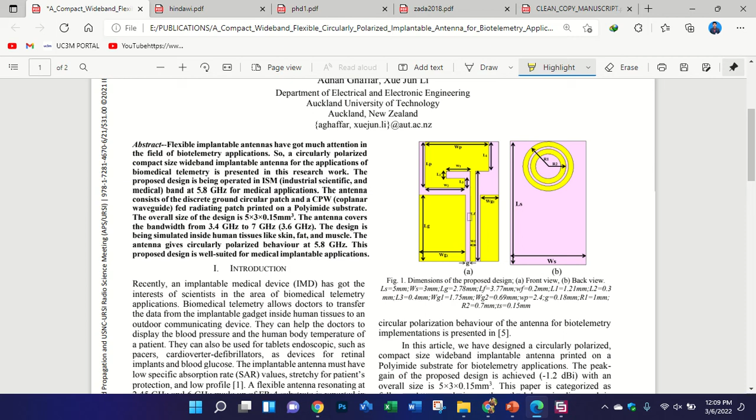So you can see here, this is a very simple design, as I showed earlier. This is a CPW ground plane, and the patch, you can see, is a modified patch, and it is circularly polarized. The size of this antenna is very small. It has a length of 5 millimeters and a width of 3 millimeters, meaning it is a 5 by 3 millimeter square area.

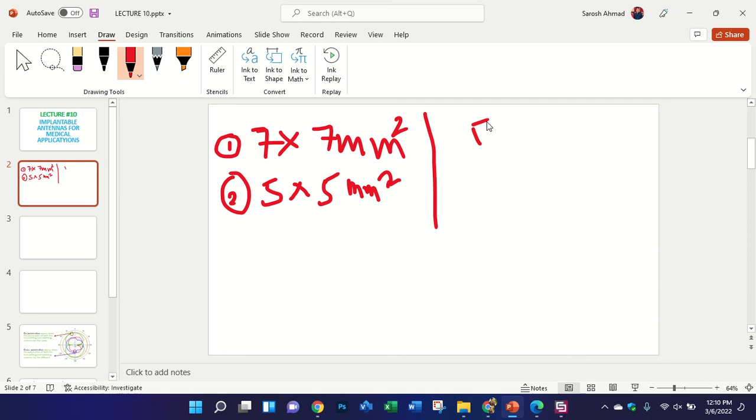Here one question arises: is this size inside the human tissue, or is this size in free space? Actually, in most papers, researchers design antennas not in free space. They do not target free space; they only target inside a human body.

In most designs, what we do is first design the antenna, then test it on human tissues and check whether the results are compatible or stable inside the human body or not. But in the case of implantable antennas, it is optional that you design the antenna in free space and then test inside the human body to check whether the results are stable or not. People, meaning researchers, do not usually focus on free space design; it can be inside the human body, your human tissue.

People do not focus on this, but in some of my papers I design antennas this way. If you make the implantable antenna in free space and it also works in the human body, then this is another kind of novelty, because when you insert the antenna into human tissue, the results will surely change due to the high relative permittivity of the skin or the muscle.

But if you do not want to make the design in free space, that's because if you design the antenna in free space, the size of the antenna will be large, and you also need to check whether it is working inside the human body or not. But if you only design the antenna for the human body, then it will be less than 5 by 5 or 7 by 7, or maybe even smaller. So in this design, first I designed this antenna in free space.

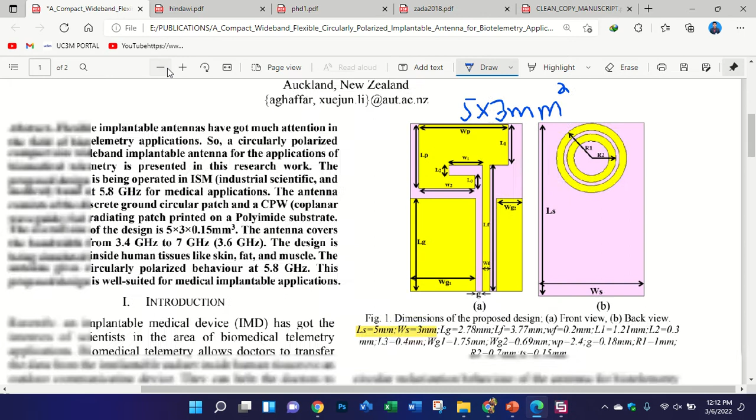This is a monopole antenna, and you can see this is the result in free space. This is the S11 that has a wide bandwidth, you can see here. This is the bandwidth, and this is the axial ratio, in free space.

But then I tested the antenna in different tissues of the human body. I tested it in free space, the red one is free space. The second, I tested inside skin, the green one you can see is also resonating at 5.8, and then inside fat, the blue one, and also inside muscle. You can see it is less than 10 dB at 5.8 gigahertz.

This is another novelty, that the antenna works in multiple tissues. In most cases an antenna works only in one tissue, like skin, fat, or muscle. We only check two kinds of tissue: skin and muscle. Forget fat, because in practical use fat is not available, only skin. For the skin we use skin mimicking gel, which has the same properties as human tissue, and for the muscle we use pork material, which has the same properties as a human body.

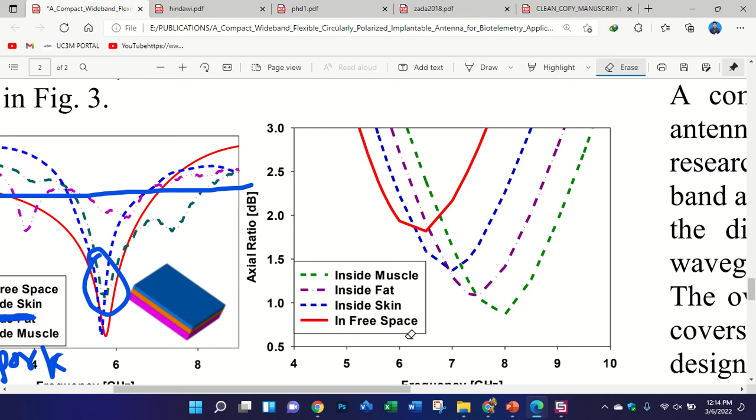You can see here the behavior of the axial ratio. It is less than 3 dB in all cases, inside fat, skin, and muscle. This antenna works both in free space and inside human tissues. You can see the size here - I compared the results with previous research, and I have a very small size compared to previous research.

I will tell you which paper you need to follow. This is just an idea to share with you, how we can design a monopole antenna. But in the case of the implantable antenna, I suggest you make a patch antenna - a slotted patch antenna fed by a coaxial probe, like this one.

Let me discuss one more paper that also works in free space, as I told you in the previous lecture. This design operates at 2.45 gigahertz. It has a size of 21 by 13 millimeter square. You see it has a much larger size than other designs, because it works both in free space and inside skin tissue. You can see it operates at 2.45 gigahertz.

This is also a circularly polarized antenna, tested on human tissues - skin, fat, and muscle. I tested the antenna inside skin tissue, and also it works inside muscle. This is the behavior of the S11.

So in this way you can design whether you want to design in free space or in human tissues. But for IEEE journals, I suggest you focus on only one thing - first check your design, either you want to design inside skin tissue or inside muscle. Also check whether fabrication or measurement facilities are available for skin tissue or muscle tissue. In our lab both facilities are available, inside skin and inside muscle.

So this is the paper that I want you to follow, and I will also share with you some more IEEE journals. I have more than 200 papers on implantable antennas, from many researchers, for you to follow.

You can see here this is a very simple design - an X-shaped slotted patch antenna. It has a size of about 5 by 5 millimeter square, here the values are written, L1 and W1. Yes, it has a size of 7 by 7 millimeter square.

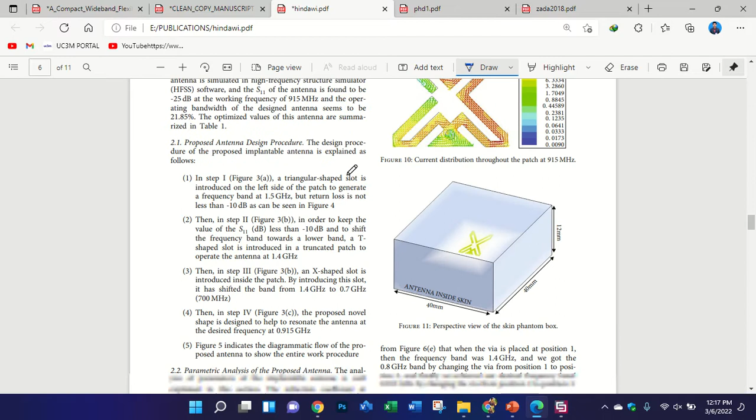This antenna is designed inside, I think, muscle or skin tissue. You need to simulate your design. In the previous lecture we first designed the antenna and then created the human tissues, but in the case of the implantable antenna you need to do the reverse process - you need to design the human tissue like skin first, and then design the antenna. We will study this case.

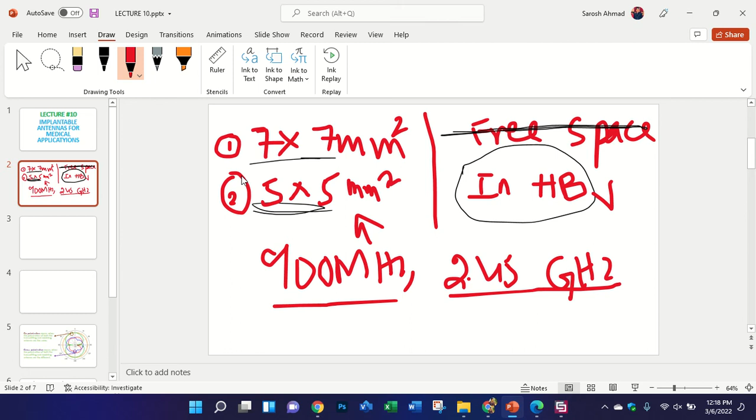This is very easy to design. Say I'm going to design a new implantable antenna with a new shape. I suggest you keep the frequency band at 900 megahertz or 2.45 gigahertz, and you only need to design inside the human body, no need to design in free space. So you can design at 900 megahertz or at 2.45 gigahertz, and you can use these sizes. If you know the size, you won't need so many modifications - you just need to play with the patch or the ground.

Now I'm going to design a new shape of implantable antenna. This is a patch antenna, and here I write the frequency - it can be from 0.3 to 3, or you can use 0 to 3, because for the moment you don't know at which frequency your antenna will operate, so you can take multiple frequencies here.

Okay, so you need to test your antenna both inside skin or inside muscle, and then you need to check in which tissue it is showing the best performance. So first, as I told you, in the implantable antenna you need to do the reverse process. You need to design the human tissue first, like skin. Okay, I am going to design skin tissue first. Skin, and I take the value of how much we have used here.

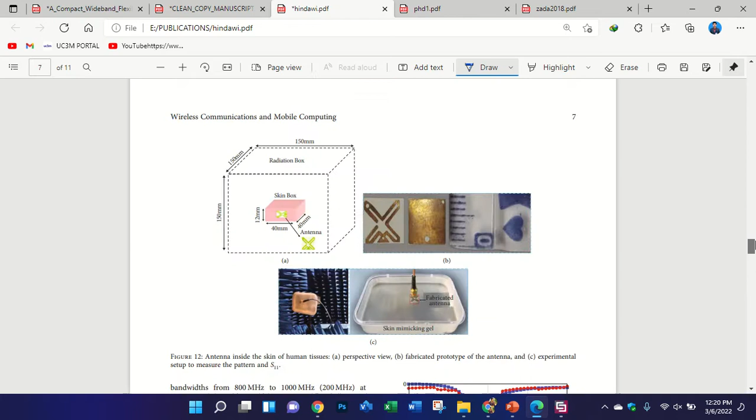This is another paper in which you can take the size. You can take, I think, minus 50, by 2. Okay, and also you can take here 25, like this. Or you can take more if you want. It is not an issue.

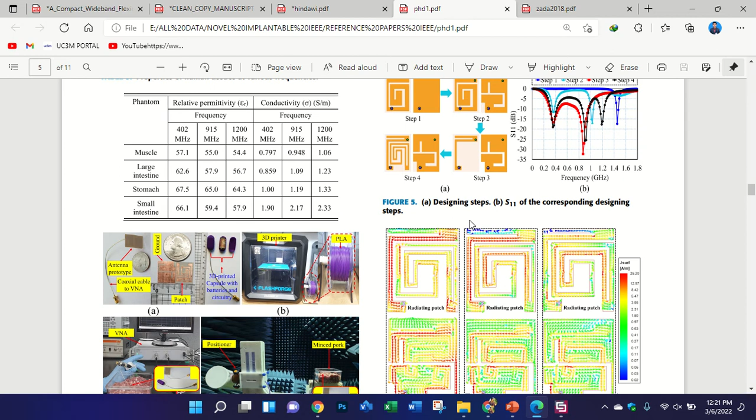And here I'm creating a new material of the skin tissue. Skin. Okay, and the conductivity I use here for the skin. They have tested inside muscle. Here I will, I think, return the values of the skin. Okay, anyway, I remember the values.

For the epsilon, it varies from 38 to 42. So you can take 38, or 40. 40, yes. And for the electrical conductivity you can take 0.88. Okay, so this is your skin tissue. If you want you can hide this skin tissue. And this is your WCS. Okay, now you can align WCS. Yes.

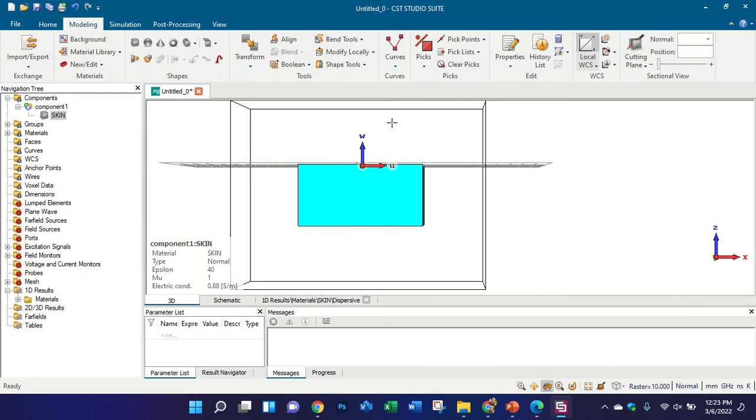Walaikum assalam. I want to ask you, if we begin to design the antenna itself, I think we will use lambda G, the guided wavelength. It's better from the beginning of the design. But what about the propagation speed? It is not free space. I did not understand what you are asking about. Because now we decide the operating frequency, okay? Yes, 915 megahertz, or 2.45. For the moment we don't know at which frequency it will operate. But at least I will use lambda G if I need to use the equation

from the beginning, okay? Yes, actually, here in CST we write in millimeter, and once the design is ready, then you can calculate its value in lambda G. But we don't need to care about the propagation speed of the electromagnetic wave inside this tissue? No, I think it will not be any issue, because after this you will calculate all the other parameters that you need, like SAR values and many other things. First let us design this one and check at which frequency it operates, and then we calculate the other parameters. Because as I said before, designing the antenna at this lower frequency, by default it will become a large size.

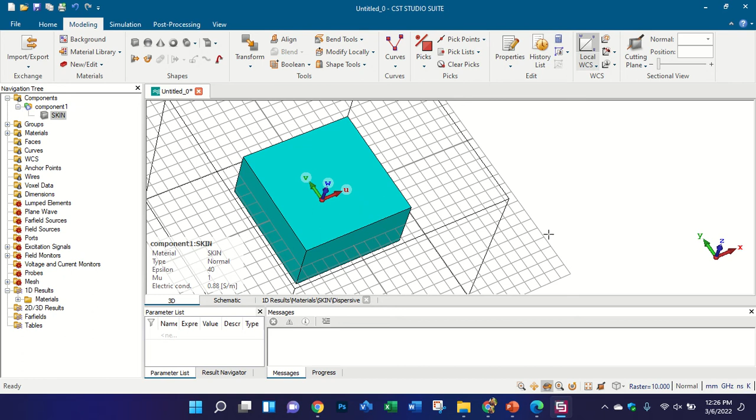And for the resonance frequency, if you want to design at 900 megahertz, then write here. And for the epsilon value, you will not write the value of the substrate. You will write the value of the skin tissue, because your antenna is now inside skin tissue that has a high relative permittivity, and it will give you a very small size of the antenna. Small size, sure. Thank you. So I care about this epsilon R, because this epsilon R is not the substrate itself. Yes. That's why we would have a very large size.

Thank you. Okay, now let's design the antenna. This is your skin, and if you want you can hide this one. Right click on it, and click on hide, and it will hide. But in fact there is a skin tissue in this area. Okay, now let's create a substrate. The best substrate for the implantable antenna is Rogers Ultralam, but it is not easily available, so I suggest you use the Rogers 5880. You can use that.

Also, Sarosh, you said, of course, maybe the area itself of the skin is not a big matter, but the skin, I think you write here 25 millimeter. 100 millimeter. Yes, I write the area of the skin tissue is 50 cross 50 millimeter square. Yes, it's not a big matter, but I think the depth itself of the skin is not too much. And it is not a big issue, okay, because suppose if you are taking 100 cross 100 millimeter square, in practical use you also need to take a skin mimicking gel of size 100 cross 100 millimeter square.

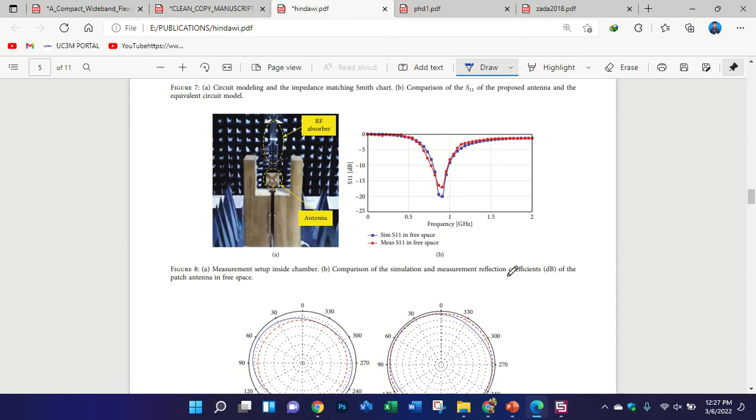I talk about this issue because if I have a multi-layer like skin and fat or something, as you show in your paper, if I want to put the antenna in this part and this part. Only these tissues are available, like if you are only testing your antenna inside skin, forget about the fat and forget about the muscle, okay. But there is no standard for the height of the skin. For example, you write here, I think 12.

No, I write the volume 50 cross 50 cross 50, okay. Yes, about the height of the skin. Actually here you are testing the antenna inside a skin mimicking gel, and you know the skin mimicking gel can be varied, but it has the same properties. No need to worry about that. But if you want, we can take the size 50, 25, like this. 25. Yes. Okay, thank you.

So you can see here this is your antenna, but I hid this one; sorry, this is skin and I hid it. Now we are going to design the antenna, the patch antenna. First the substrate, and then we are taking 5 cross 5 millimeter square. You see the size is very small. But is it better to start with the antenna or with the environment around it? It is not a big matter, because your design is now inside skin, so forget about the other things.

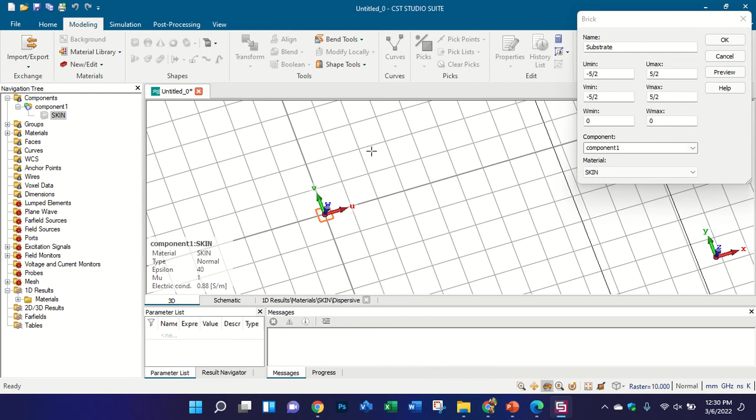No, I mean when implementing it in CST, starting. I know the calculation is a different thing, but when I start designing in CST. Yes, if you design the antenna first without the skin tissue, in free space, then your antenna will operate maybe at a high frequency, like 28 or 38 gigahertz. Because of the high relative permittivity of the skin tissue, it will not operate at very high frequency. No, I don't mean that, I mean about the drawing, when we start the drawing in CST before any process. Yes, it is already inside the skin tissue. Okay, thank you.

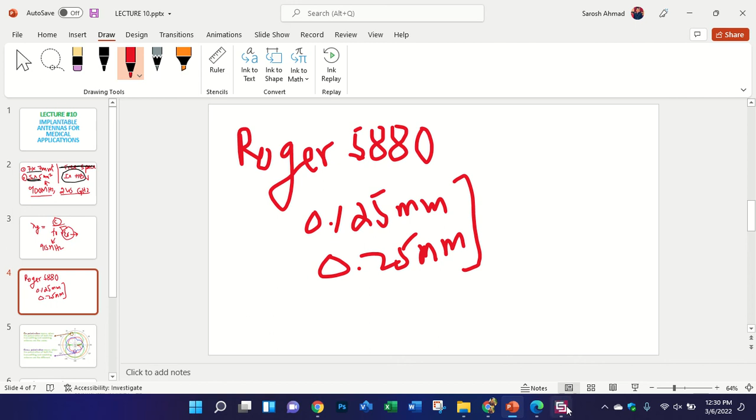And I was telling that you can use Rogers 5880 with these two thicknesses: 0.125 millimeter and 0.25 millimeter. You can use these two thicknesses because in an implantable antenna we need a very low substrate thickness and very low volume. It has a relative permittivity of 2.2. Okay, I am using here TS as 0.125, and the material Rogers 5880.

Wait a minute, I think I took the wrong value, we set it. Now click on it and no to all. The size of the antenna is 2.5, not 5, so we take it. Now it is 5 cross 5 millimeter square. You see this is a very small antenna. Wait a minute, now it is okay, it should be like this. Yes, dear Amrish,

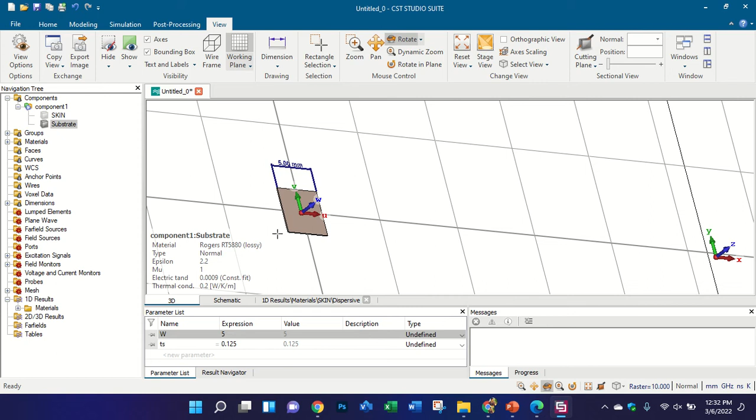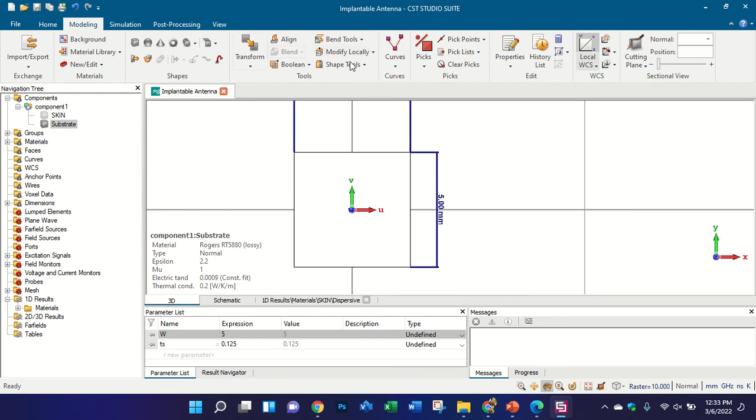We will create a patch. Also I save this design, maybe it will give better results, and it does not take much time in designing. So we will simulate it multiple times to check the frequency. Now let me change the color of the substrate.

Okay, now it is visible. And first, as I told you, I suggest you make many slots, and you can design any shape of both the ground and the patch to achieve a circular polarization pattern. I will also give you some of my designs in CST.

Okay, first I'm going to create an outline with this one. So what can we design here? I am starting from the edge. I designed so many beautiful shapes in CST. I will show you in a while.

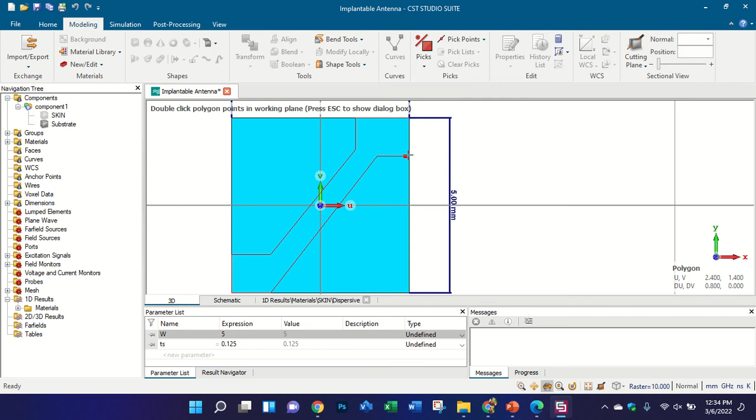Okay, you can write here 0.0175, the thickness of the patch, 0.0175. Okay, so this is your patch. Or even if you want, you can rotate this patch.

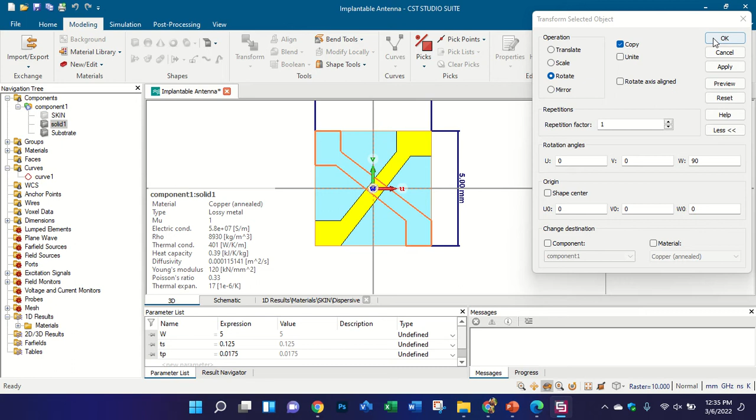Make a copy, in this way, because this is a benefit of the symmetrical size of the substrate. Like this. And you can add this one, and write the name patch. Okay, so this is your patch.

Now, in this small size of the antenna, you need to use shorting pins to keep the size compact and to achieve a lower frequency band. So you need to remember that if you are going to design the ground plane, you need to know where your patch is, so that you can connect the shorting pin. So you need to design the ground according to the patch.

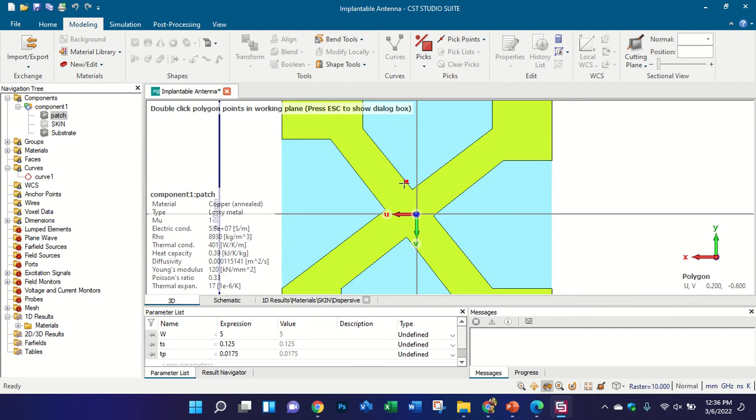First, let me align my WCS on the other side of the substrate, and then I click on the patch. Now I create the outline by looking at this one. So from where can I start? I can take a small portion of the patch so that we can connect the shorting pin.

Also, a lot of research has been done, as I told you, on what we will search in implantable antennas. I will give you more important ideas at the end of the lecture.

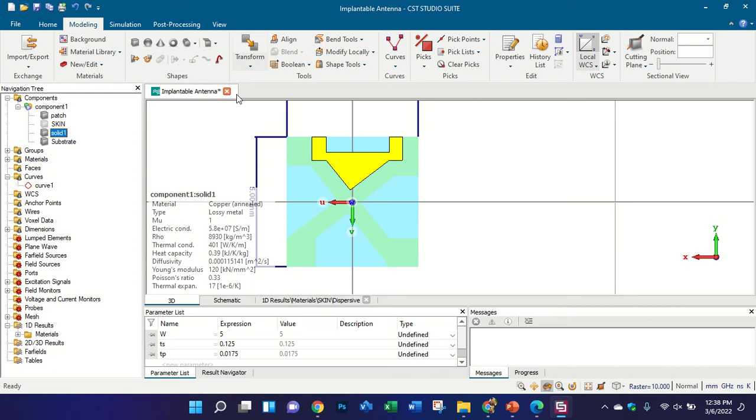Okay, so this is your small patch on the other side of the substrate, and you can make a copy of this one. You can see here this is a new shape, but you can connect this one with the shorting pin if you want. So this is your patch.

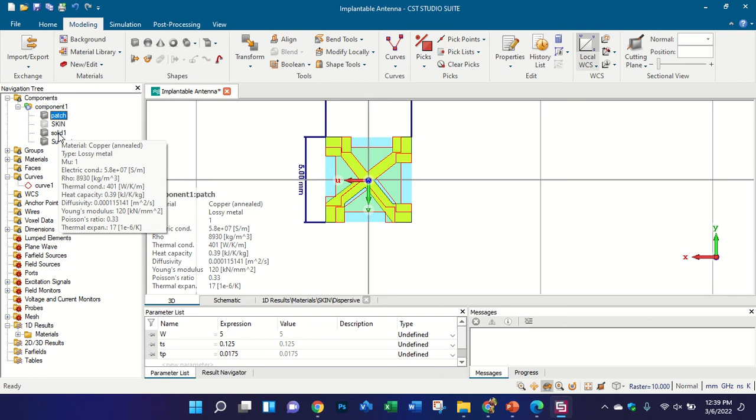And you can see where your patch is, and where your ground plane is. First add all the ground planes, now click on the patch. You can see you can easily connect the shorting pins wherever you want, but you cannot connect the shorting pin at the center of the patch. So you need to use the shorting pins on the edge side of the substrate.

So I'm going to use a shorting pin here, or you can use it on the ground pin; it is easy for you. You need to use a shorting pin of size 0.5 by 2, meaning 0.25 millimeter, or it can be less. You can use 0.2 millimeter of size.

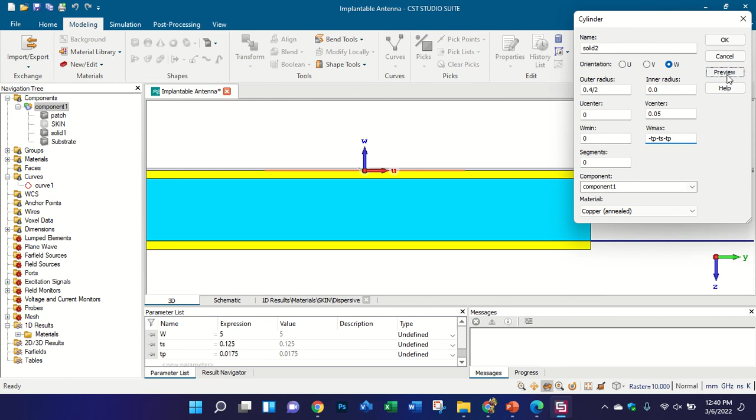This is your shorting pin, and the shorting pin must be connected with the ground and patch. I'm taking minus TP. Minus TP means downward you have the thickness of this patch, and then you have the thickness of the substrate, so I'm writing minus TS, and then you have a patch, so you write minus TP. Click OK, and you can see it is connecting with the patch.

This is your pin 1. You can use multiple pins. And you can change the color of the pin so that it is more visible. You can use red. This is your shorting pin that connects the ground and the patch.

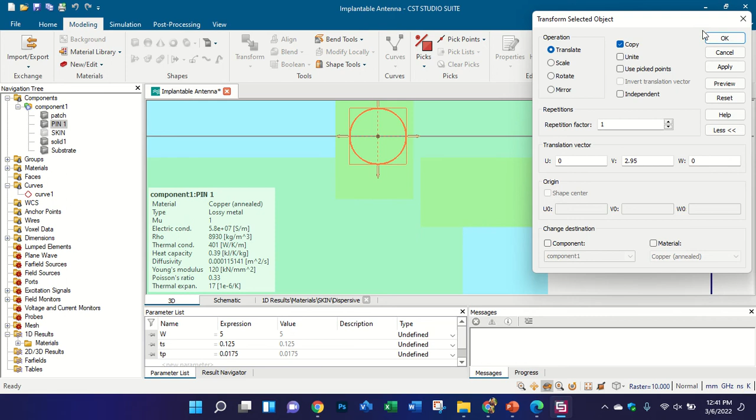And you can even transform the pin like this. You can make a copy of the pin, but keep in mind the ground and the patch. So you have two shorting pins, and now we want to feed the antenna.

So in order to feed the antenna, you can use a very small patch, like this, where you want to feed this antenna. And you need 0.1.

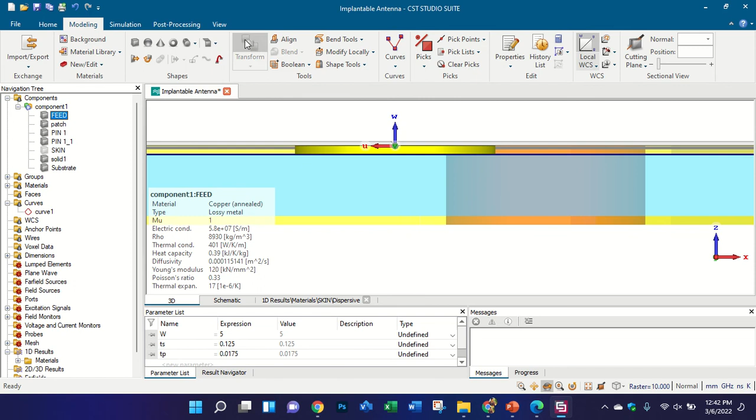Okay, and you need to take minus TP, this one. And you can transform this feed. This is your feed, that is inside the patch. You shift this one inside the ground plane, like this. Click copy, and okay. Now you have a small circular patch inside the patch and inside the ground plane.

Now you need to add both. Now it becomes one. And in order to feed, you need to go to the pick points, pick circle center, click on the lower edge. Then again choose this one and select the other lower edge of the other patch. Now go to the simulation, use a discrete port, change inward direction, and click OK. And you have a probe here. You can use a coaxial probe here of 50 ohm.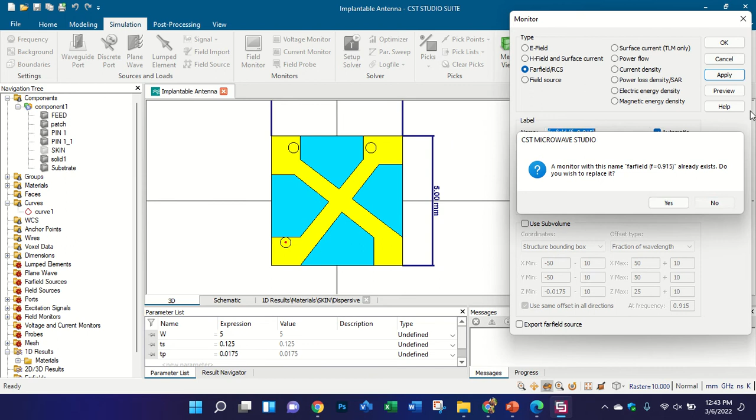Now we will simulate this design. Click save. We will simulate and check everything about it. So in the far field we need to check 915 megahertz, 0.915. We already saved. Normalize to fixed impedance and start simulation. Implantable antennas do not take much time in simulation. Let's wait for the results and check at which frequency it is working.

Hello, Ahmed. Yes. I want to ask you, are all implantable antennas simulated like that? What? Which antenna? All implantable antennas simulate like that? Yes. We don't make a waveguide port? No, I am using a discrete port here if you want to feed the antenna with a coaxial probe.

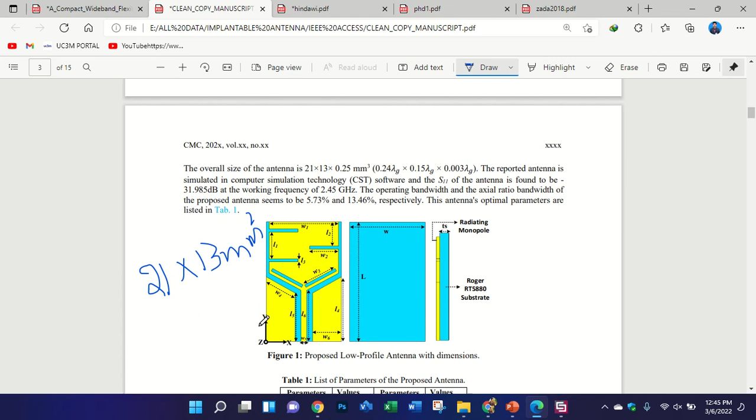In these designs you can see here you can use a waveguide port because I am using a strip line. And in this case also I am using a coaxial connector or a waveguide port, but in this design you can see the shape of the antenna. I use one shorting pin that connects the patch and the ground, and this is a coaxial probe. You feed in CST like this, as I have done. This is a simple way.

Because when you change the port like that, you get a small change in frequency. If you want you can create a coaxial probe here, but in CST and also in practice you do not use a coaxial probe like a connector, because the connector is much larger than the antenna, so you need a mini connector. Maybe here you can see.

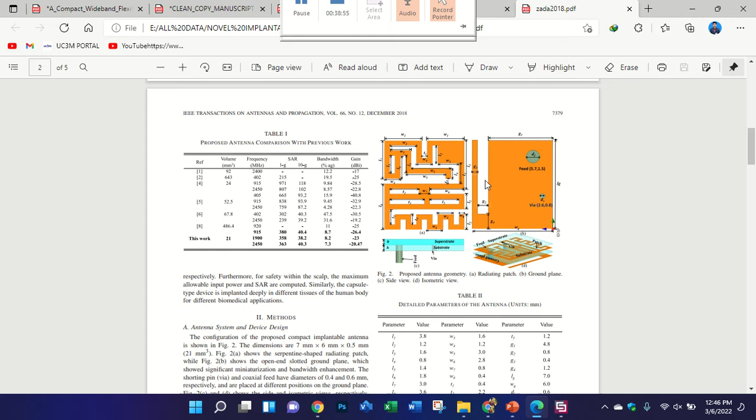Actually, we designed one for the capsule. I think it depends on the small battery. Yes, that one is the capsule endoscopy, you can see here. It may be related to the small battery. Yes, I worked before on one paper on this, a capsule, and also we used a discrete port. It was a folding capsule. We designed the battery because they rejected our paper and asked us to do it. It takes a long time. Okay, that's great.

Actually, where did you submit the paper? Because one of my friend's papers was accepted recently in IEEE Transactions. He just designed a very simple antenna without any battery, without any capsule, and it is multi-band and circularly polarized. It was 6 months ago and they rejected ours. They said, where's the battery? We need to design the battery. Alhamdulillah, we could finish it, and now we are writing. Yes, maybe they ask about it.

Maybe you claimed in the title that you designed a capsule-based implantable antenna. Yes. That's why. We use a discrete port. Yes, it's easy. Implantable antennas are very easy; just achieve more wideband and circular polarization. If you achieve this, then you can easily defend your design.

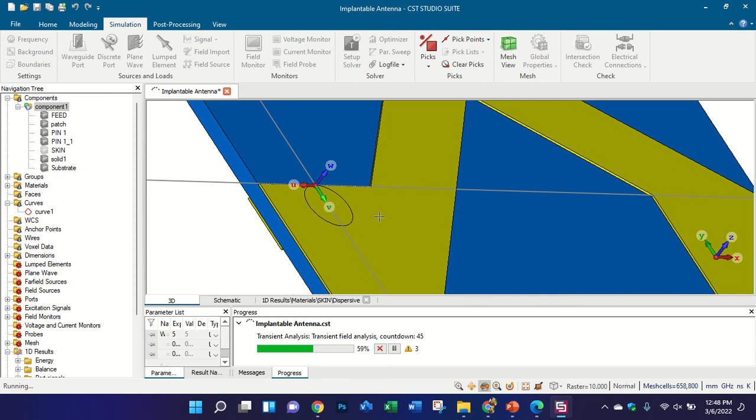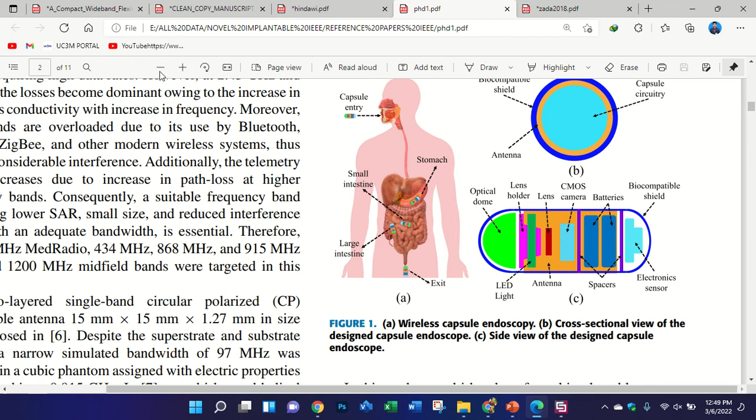I think the battery supplies DC, but the antenna needs AC to work. So we must put more components inside the capsule if we use a battery, because battery is DC and DC frequency is 0. How to calculate that? How does the antenna work with that? So we must add more components if we want to use a battery.

I think so, because in this case they have used many things. They have used a camera, lens holder and batteries. This is a biocompatible shield, made of capsule. Yes, we must use a component that converts the DC to AC. It is very, very small, yes.

But sometimes we believe in the folding antenna and the patch and something like this. But its fabrication is not easy. That's why most of the people like to work only on simple patch antennas. Fabrication is very difficult for this part. Yes, that's why many people like to work on simple design. It's like nano, it's very small.

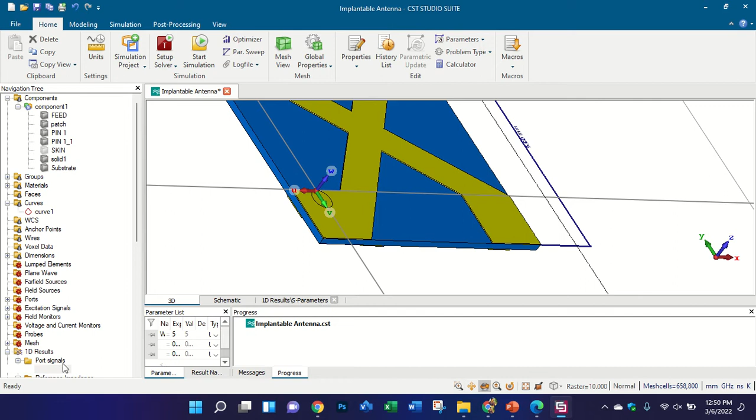The big issue is the stomach permittivity itself. It causes trouble for us. Actually, on this one point the paper was rejected. Anyway. Okay, it is working at 1.5 gigahertz. We need to shift it. So let's check the surface current where it is resonating. I think we need to improve the matching.

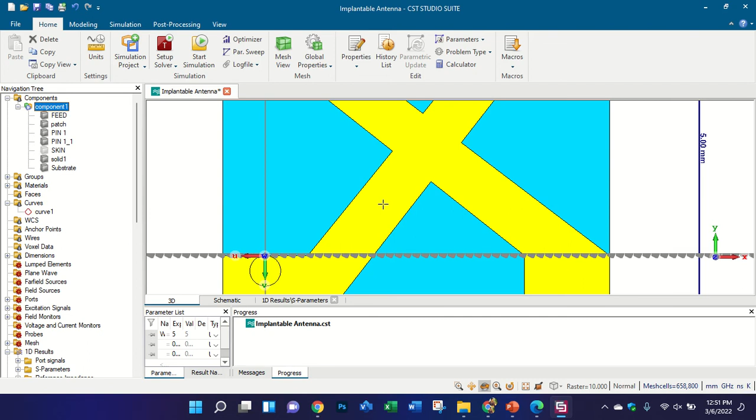Okay, let's check it at 915 megahertz. Yes, this portion. If you vary this width and the opposite side of the ground, this side of the ground is working for 915 megahertz. Also you can increase or decrease the shorting pins, to check what will happen if we use only one shorting pin. Let's check it first.

There are a lot of papers by my friends recently published in IEEE Transactions. Let me show you their papers. As I told you, IEEE Transactions easily accept implantable antennas if you have even small novelty. These are my friends, they are also Pakistani. He folded it. This is a simple design, but they have used a superstrate and substrate of different thickness.

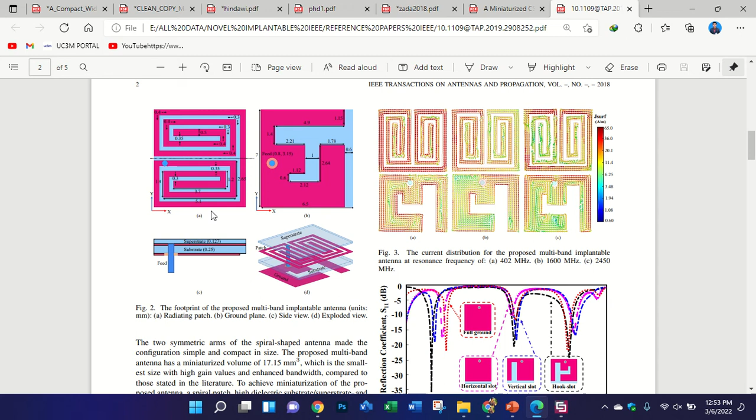Actually, I want to explore this point also, Brother Sarush. The superstrate, in our antenna, if we use it, I think performance will become good. Yes, with superstrate it will become more compatible. You use superstrate when you want to put this antenna inside a capsule. Here they are using a capsule, but in this paper they do not use superstrate, just a tissue. Some people like it and some do not. You can try it. The radiation pattern may change, and the performance also.

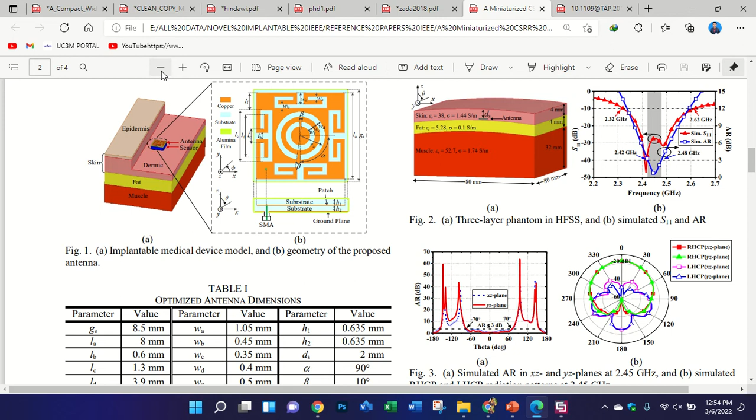But the superstrate material, is it available also in your lab? Yes, I think so. If you have the property, could you send us, please? Yes, I will send you. In most cases they use the same material as the substrate. If they are using the Rogers Ultralam substrate, they will also use the same material for the superstrate, but with a different thickness.

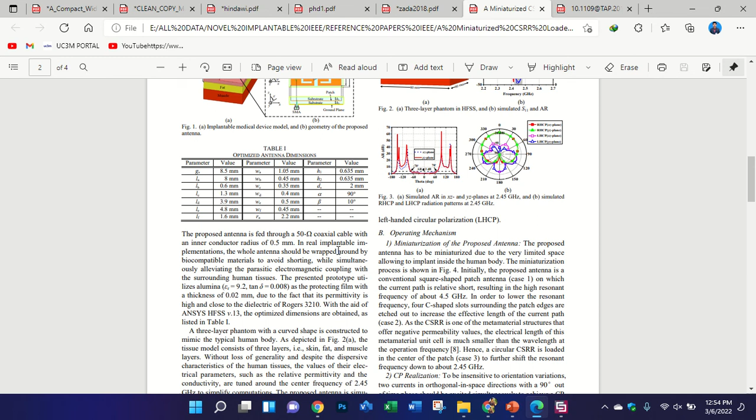I hope we can target this journal. Actually, we try the letter, Antennas and Wireless Propagation Letters. Most people work on implantable antennas. This is a very good topic, and we can target a good journal on implantable antennas. I hope an IEEE letter at least at the beginning, because the letter has a small number of pages and can be validated in almost 1 month. I designed many implantable antennas but did not publish yet. I am working on them. You can see the results have very good shape.

But Brother Sarush, you said if we are not getting ideas for designing, we should go to a graphic designing website and design different shapes, and we can modify them.

Yes, and this is the design I made. It has a size of 5 by 5 millimeters, and it is a wideband antenna. You can see I am working on it. This is the front view and side view. I use two shorting pins, and this is the probe. You can see the results are very good, it's wideband. In most research papers, they are only single or multi-band, but not much wideband.

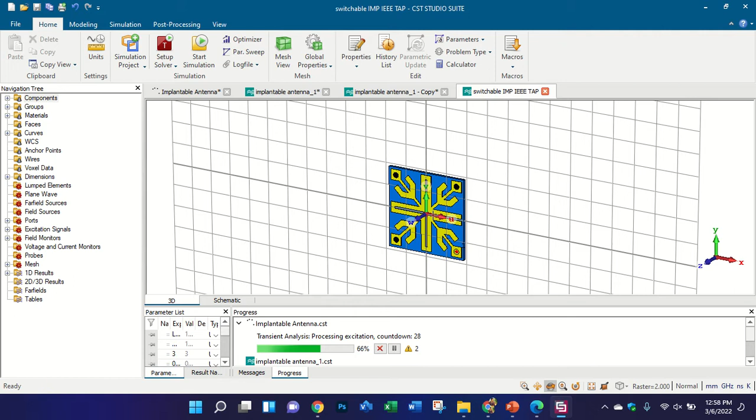I show you now. This is... what about the size of the component? Let me show. This is the design, you can see very beautiful design. This is the front view and this is the back view, the shape is very beautiful. And here I can use a diode.

This is the results with the diode. When the diode is on, it behaves like this, and when the diode is off, it is like this. This is inside skin, and without ground, inside muscle it is like this. When diode is on, there is no big difference, but in the case of skin, it is showing like this. So this is a reconfigurable, frequency reconfigurable implantable antenna.

But I am asking my professor if he can purchase a very small sized diode. If he is able to purchase it, then we can target the reconfigurable antenna. Yes, nice. So the second idea is the reconfigurable, frequency reconfigurable.

The third idea is metamaterial based implantable antenna. We can make it wideband or ultra wideband, if we work on it we can achieve this. And we won't need to use a capsule or other things, we can define our design very easily.

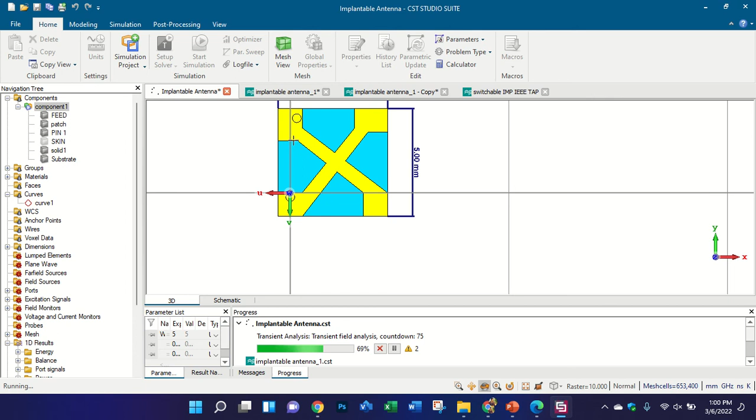The fourth thing, if we make both wideband plus circular polarization. This design I was able to achieve wide bandwidth, and I think it is also wide circularly polarized, I think so. I am working on it to improve the circular polarization. You can see here, it's interesting.

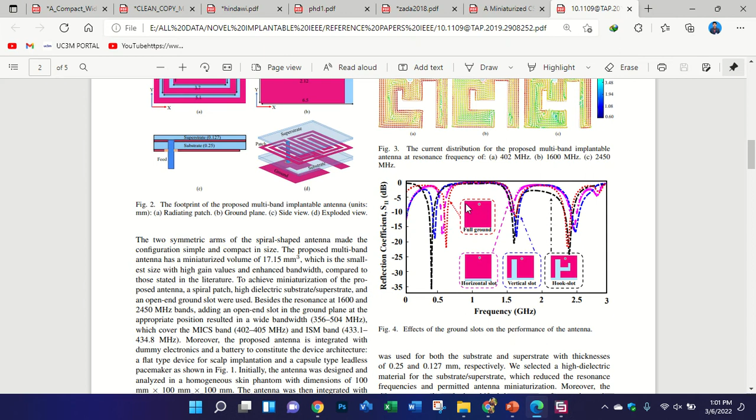I am working on it, and in this way you can create a new shape. This is a very simple shape, just to let you know, but you can use different shapes, whatever you have in mind. Once you make it, you can see this is also a good shape. I'll also show you more papers that have very good shapes. You just need a good shape and good results. To think of a shape itself takes time.

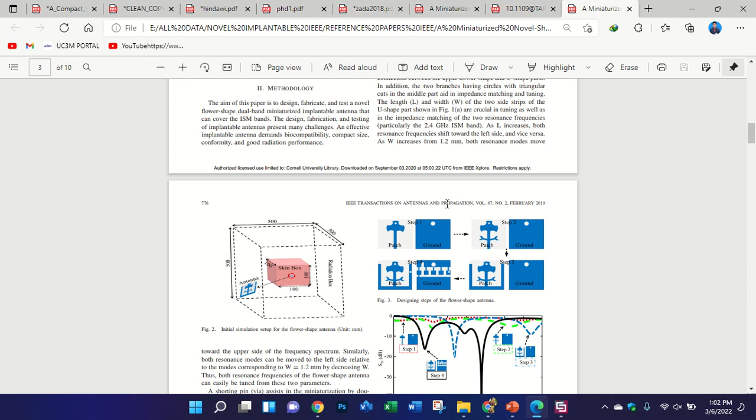If possible, could you send us the graphical website so we can also modify it? Okay, yes, I will share it with you. You see, they did not use a capsule, they simply fabricated the design and tested it inside tissue.

Anyway, how can we use our phantom? I think you showed us a paper maybe 15 minutes ago, where you use the same phantom and inject the antenna inside it. We can use it, I see.

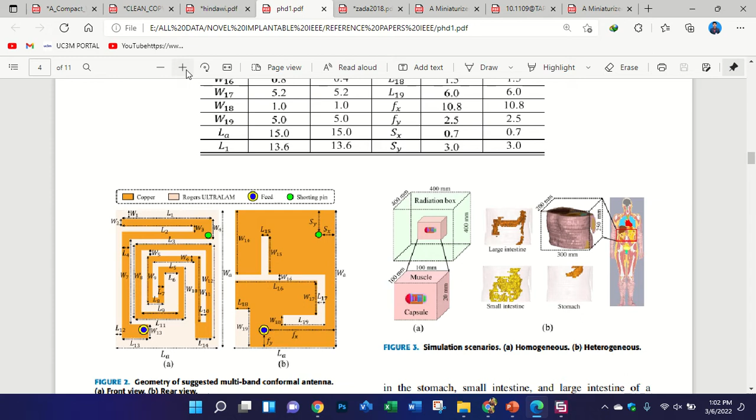Which phantom are you talking about? The one from yesterday I think, one paper you showed us. Yes, this one, it's similar. I think he used the same phantom. Yes, I used the same.

They designed it in HFSS software, that's why they mentioned the radiation box and other things. So this phantom tissue, I can also insert the antenna inside it, yeah? Yes, yes, it will become more realistic I think.

This antenna is operating at 1.5 gigahertz, and it's also showing circular polarization.

So when we start working on the design, I will help you and give you some ideas about the shape, how it should be, and then we will work together to target good journals. Okay, please. Okay, I will show you the current bar, how you can move your current bar.

Excuse me sir, you've shown here your gain is around 4 or 5 dBi. I want to know what is the best range usually for gain and directivity? What is considered the best, and what is the maximum limit? Okay, let me describe here.

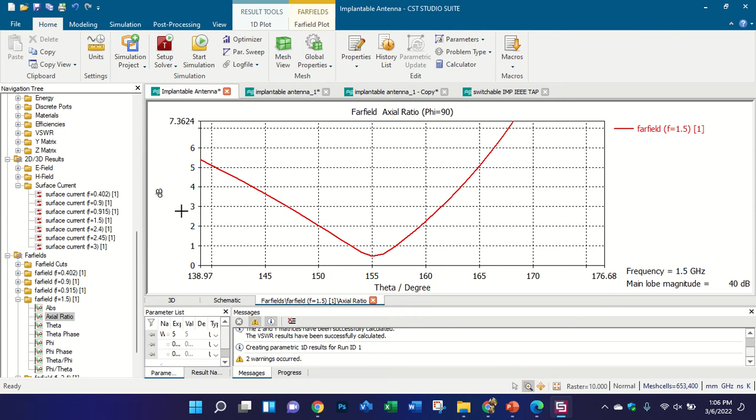Let me check the axial ratio, you can see it is below 3 dB, and also check on the other frequencies. Only at 1.5 gigahertz it is showing circular polarization, but it is not wide, it is very less bandwidth.

In this way you can design implantable antennas, if you want to change the properties. If you want, like you have used skin, you can test this antenna inside muscle instead. I'm writing here 'muscle'.

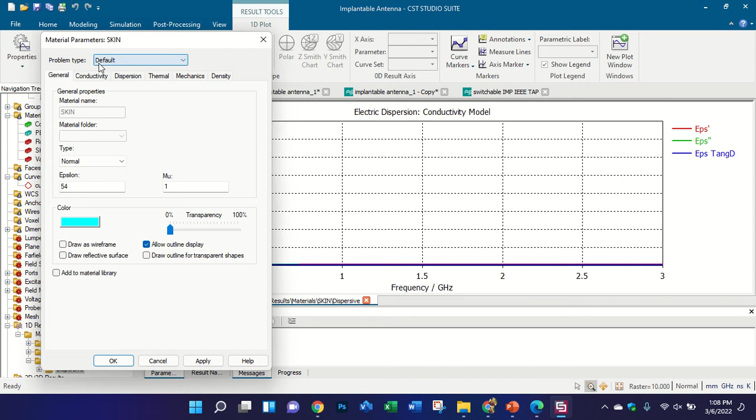Yes, also you can change the name here, muscle. Okay, now you can see you have created a muscle.

If you insert an antenna between two layers, I think it will have different performance. Surely we will have different performance, but in implantable antenna you only talk about one muscle or tissue, as I told you in this case.

But what is the acceptable gain? Because our friend asked about what is the acceptable gain in case of implantable antenna. Yes, let me share here.

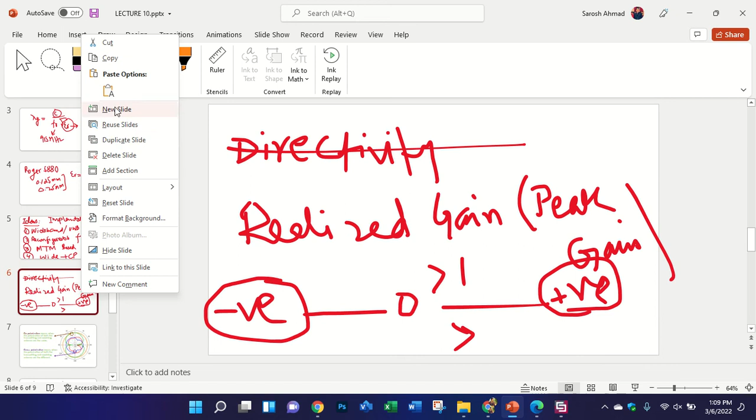Actually when you insert your implantable antenna inside the skin tissue or any human tissue, your antenna gain becomes more than minus 30, or it approaches minus values. So in implantable antenna you need to move towards the positive side. Like maybe you achieve more than minus 10 dB, then it is acceptable. Maybe it is minus 5 dB, it is acceptable. You need to go to the positive side. That is the main idea.

Because in the previous research, if you see the comparison table, maybe you will have it in this paper. No, I showed you minus 1 point something. Let me show the comparison table here, and you can see. It was minus 1 point something, I remember.

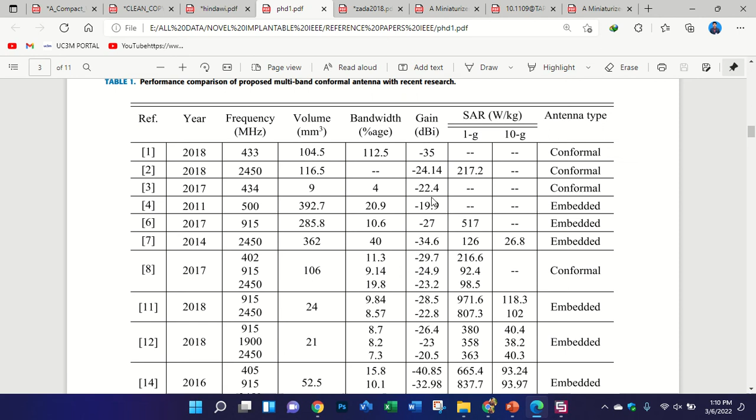Now you can see this is the gain. You can see in the previous research it is minus 30 dB, minus 35 dB, minus 19.9 dB. So you need to achieve, you can see they have achieved better gain than the previous one. So you need to go towards the positive side.

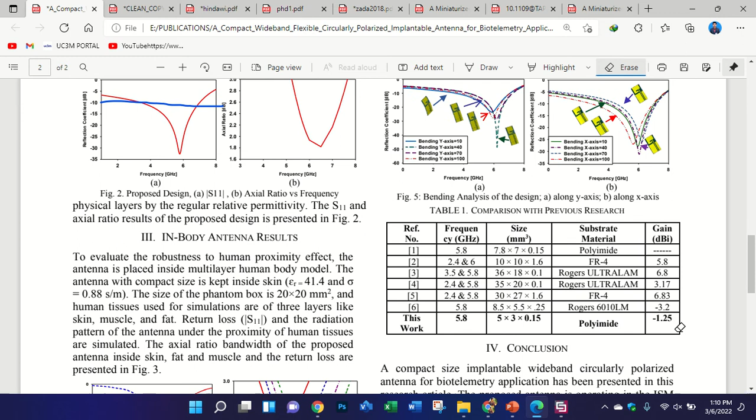Maybe I think in your paper you showed us one paper, it was minus something, a small table for comparison. I don't remember which paper. Yes, this one you are talking about, this one or the other one. This one, minus 1.25, I think. Yes, minus 1.25, but this is at 5.8 gigahertz, and the size is very small, and also I use many tissue layers here. You can see skin, fat and muscle.

So we can also simulate this one inside muscle. But you know, now you understood the process to design implantable antenna.

Now the main thing is to design a new shape with new results. The shape must be good looking, that whenever everybody sees it, they say wow, it is very nice. But the problem is the shape itself is a problem. You need to set a simple shape for the optimization to become easy.

Because if you make a complicated shape, maybe circle or triangle or something, you need to optimize all these items, and sometimes you find your shape becomes distorted. But if even IEEE generally accepts difficult complex shapes, not easy shapes. Complex shape actually takes a long time to optimize, but you will have more results.

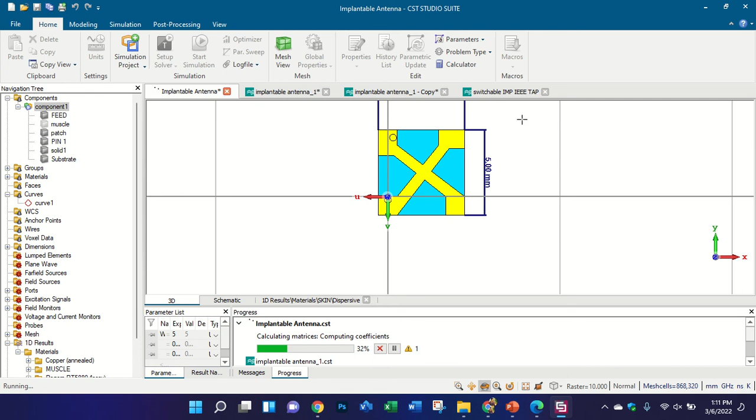Like you optimize the slot of many elements, this one you can see the design is very good, but you need to optimize. But you see this left portion, right, down, and this one are all the same length, so you don't need to optimize all of these, you only need one element. This is the key.

Yes, this is like an array. You can see there are 4 elements in the array, and I am working on it. I have fabricated this one. I am working on this design. And also this one, this is also a very good design.

At the end, once we complete all the lectures, then when we start our designing, I will surely help you in every case. I will guide you in every way, inshallah, because our main target is to target a good journal, and we will surely write.

Hope to open the door of the IEEE. I like only IEEE. Now I have published a lot, but now I want to move towards IEEE transaction. Inshallah.

Excuse me, Mr. Sarosh, how about the duration to publish, from submission until publish? Can you repeat, please? How much time does it take from submission to publish in IEEE?

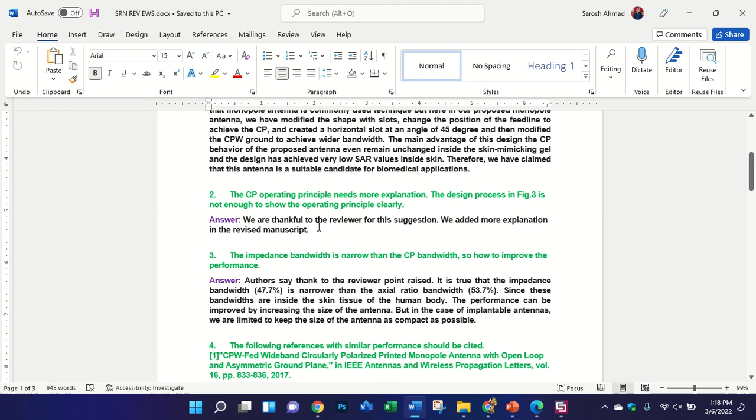So you need to give more explanation to defend. And if a reviewer asks you to cite their papers, it means they are going to accept your paper, because without acceptance, how can we cite their paper? Yes, that happened with me before. A person asked me to remove five references and add other references. If you do not cite, they will reject; if you cite, they will accept. He wants to increase his citations. We will discuss in the last lectures how to address comments, because many of my students don't know how, and I had to do it myself.

Subhanallah, Subhanallah.

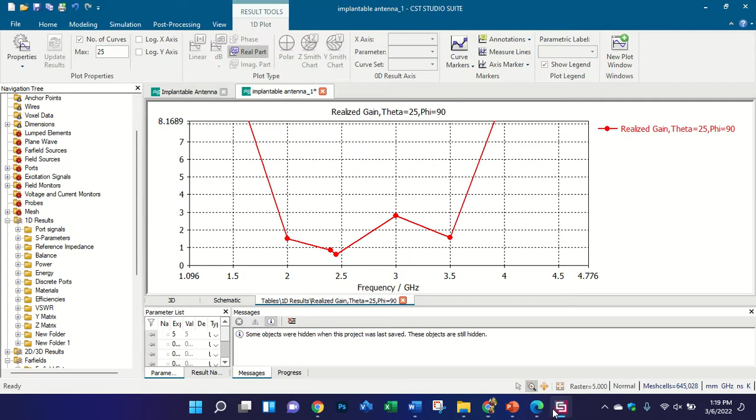But actually, Elsevier journal, like the AEU journal, it is a good journal, but it takes a long time, 6 months to have a publication. No, if you submit in a free journal, because AEU is a hybrid journal. Okay, if you submit in a paid one, then it may take maybe 2 weeks or maybe 1 month. Okay.

For free, not open access? What? For free, not open access selection. I mean open access. Yeah, open access, yes. Open access, it will become fast, but for free, it takes 6 months. Yes. Because in my paper I got reviews after 1.5 months. Okay.

If someone likes to target, because we have some good journals, I will suggest which journals we should target. I prefer you not to go towards MDPI journals. I already have so many papers in MDPI, more than 12, but I do not want to focus on MDPI, because MDPI is going down day by day. Some of my friends were rejected for the PhD or for the postdoctorate because of many journals in MDPI. So that's why I do not prefer MDPI journals now.

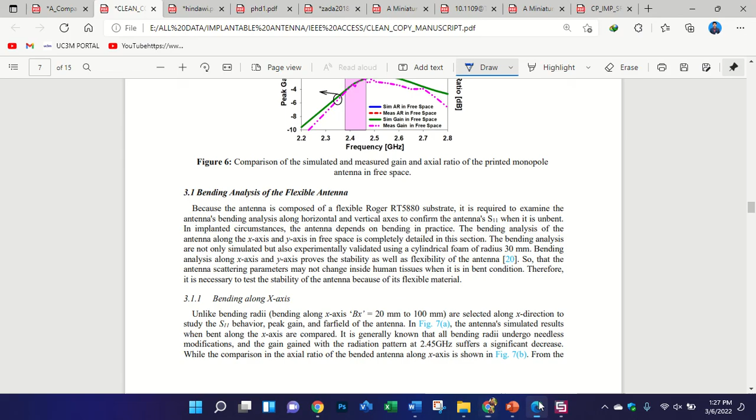We can check here. No, you don't need to check it from SJR, brother. It's better from Clarivate. Yes, we can check Clarivate, but it is Q3. SJR is Scopus, and the Scopus scale is different from Clarivate Web of Science. Totally different. Anyway, maybe now it goes up, maybe it is Q2 now.

So we have these papers. Do you know any journal belonging to Web of Science? All these are Web of Science. If they are Web of Science, surely 100% they are indexed in Scopus. But sometimes no. We can talk later, okay? Because time is going and many people are waiting.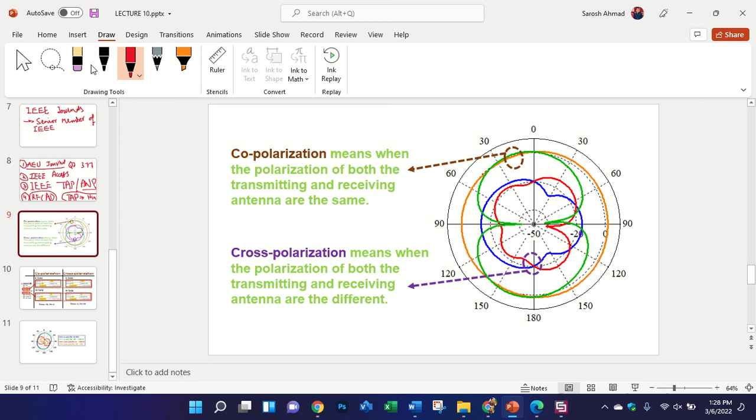Yesterday I realized that most of the people got confused about co-polarization and cross polarization. I made 3 slides for you so that you understand the concept of cross polarization and co-polarization. Both are almost the same, the difference is only this word. You can see here, whenever you find a radiation pattern like this that seems very small in size, it means it is cross polarization. But here we will discuss in detail.

Excuse me for disturbing you, but it's better to show it also by the axis of the antenna, because it's related to the design axis of the antenna, X, Y, Z. Yes, in the next slide I will explain. For now we will study the definition. For phi and theta or something like this? Yes, in the next slide we have it. First, we are just studying the definition.

Co-polarization means the polarization of both the transmitting and the receiving antenna are the same. In the case of cross polarization, it is different. As I told you, if you find the radiation pattern less than -20 dB, then it is cross polarization, and if you see a big one, it is co-polarization. Now let's discuss in brief detail. I took a screenshot from CST and wrote here. This is the main concept of co-polarization and cross polarization.

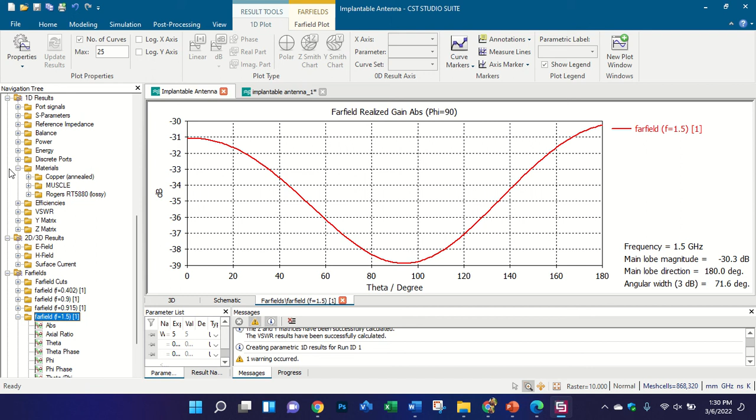First, in CST you will find the far field option like this. Let me check. In CST you want to find this one. Let me create a new folder to paste the data and explain in more detail. I am creating a new folder, writing here co and cross polarization. I will paste graphs here.

Okay, first one, we have a far field. Go to the 2D plot. Yes, this is the 2D plot, and you need to remove these pattern lines. Okay, now this is your far field. You see in the slides you have this one.

And for the co-polarization, what you need to do, you need to go to the theta. Yes, for the E field. You have two options, theta and phi. But in this simple case, if you click on the far field, you will find ABS here. You don't need ABS here, you need theta. If you click on the theta, you will find this one.

Theta. And then, you can see here, if you click on the theta, you can calculate the E field of the co-polarization and the cross polarization. If you write 90, then it is the co-polarization. But if you write 0, it is your cross polarization. Like if I click on the theta and I write here 90, then it is my co-polarization.

So I copy the data and paste it here. I paste it here and I write here, this is co-polarization, but in the case of the phi, phi is equal to 90, or whatever it can be. I already saved it in the next slide. Like this, I will explain.

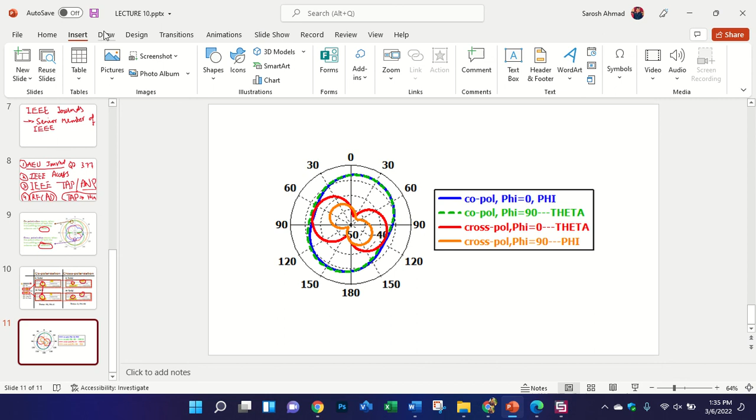Thank you, Brother Sarosh. But it also depends on your design axis, Brother Sarosh. If you design the antenna in XY, because some people in some papers may design in YZ. Yes, because if I talk about the XY axis, then people may again be confused. Okay, but they must know that for phi equal to 90, you will have an XY plane.

Because in the previous lecture I described that if phi is equal to 90, we have an XY plane. Okay, XY plane. But this is in the case of co-polarization. In the case of cross polarization, it becomes the YZ plane. Okay, phi is equal to 90.

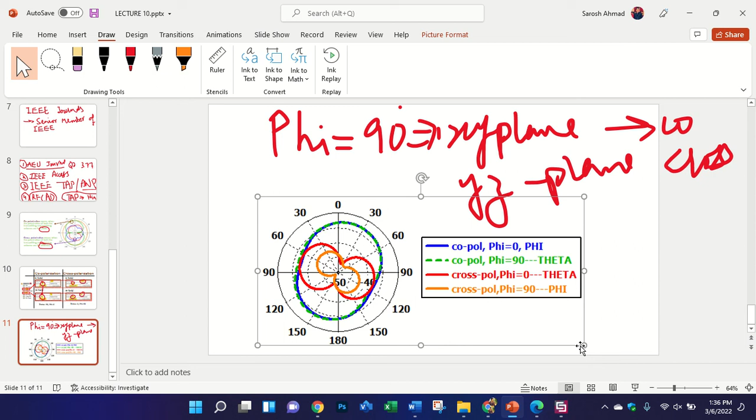Okay, if I say this, people again get confused about it, because they did not study the paper and they don't know. Researchers sometimes design in different planes in their papers. If you read the paper, yes, I know. That's why. It happened with me maybe 10 years ago when I was confused, but I got used to it. Just keep this in your mind. Okay, what we have for the E field.

I think I found something wrong in one paper, one year ago, on my antenna. They made it totally wrong, but it was accepted. I don't know why. Maybe the reviewer did not concentrate on this point. Maybe because in most journals, reviewers are from different fields, so maybe they don't have enough knowledge about that. But it was totally wrong. Yeah. The author, I don't know.

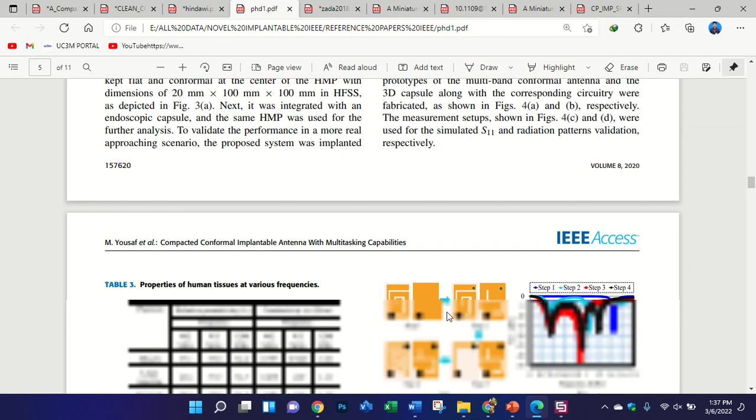Okay, let's check the results inside muscle. Mr. Sarosh? Yes. In the case of implantable antennas, can we measure EMI and EMC to know the interference with other devices? What do you mean? Because it's very important, especially in medical. I mean electromagnetic interference and compatibility. For the compatibility, you can calculate the SAR values.

Actually, in this case the concept of the SAR value is different than for human body antennas. As I told you in the previous lectures, human body antennas have SAR values less than 1.6 W/kg for 1 gram and less than 2 W/kg for 10 gram. But in the case of the implantable antenna, you will not get these types of values. Like for EMI, for the interference.

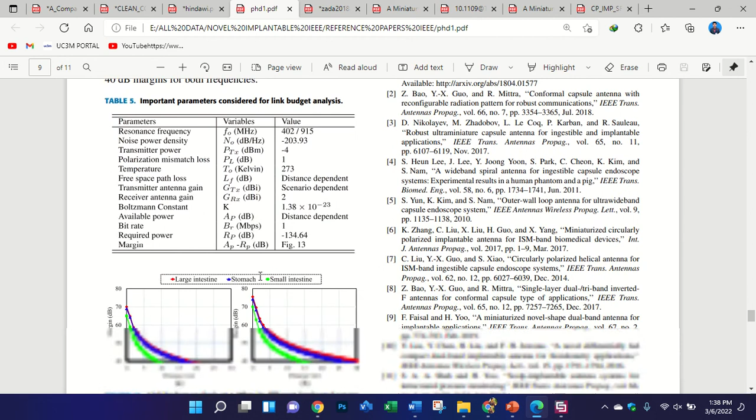For the interference, I did not understand your concept. What do you mean by interference? Because there is a link budget. Okay. There is interference between the other devices. In that case, you calculate this one, link budget analysis. You know link budget analysis. Maybe other devices affect this antenna. Actually, link budget analysis, let me draw here.

Like you have an antenna, the proposed antenna you designed, and you have a very small patch antenna, and you calculate the distance. You have implanted your antenna inside a human body, and there is another antenna outside in free space, and they are sending information from one device to another. And how much distance they are covering.

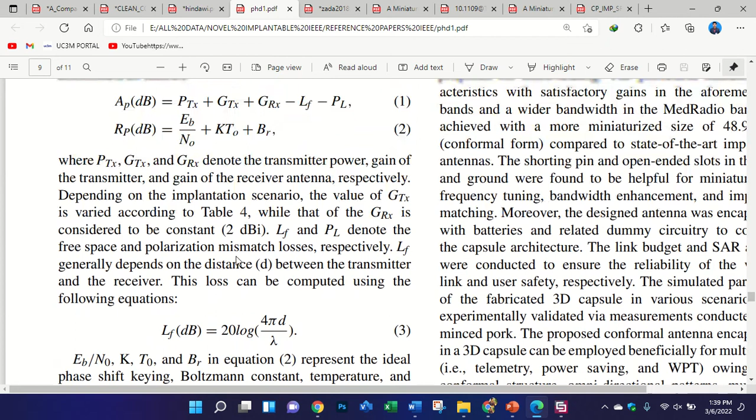In this way, in order to calculate the distance and other things, you calculate the link budget analysis: at how much distance you can collect the information from this antenna. There are formulas, and you need to write MATLAB code or similar.

Sometimes in HFSS you directly calculate the link budget analysis, but in CST I am not sure, because I import my design in HFSS and calculate it there, or send it to my friends to calculate. Okay, so we cannot study or measure EMI.

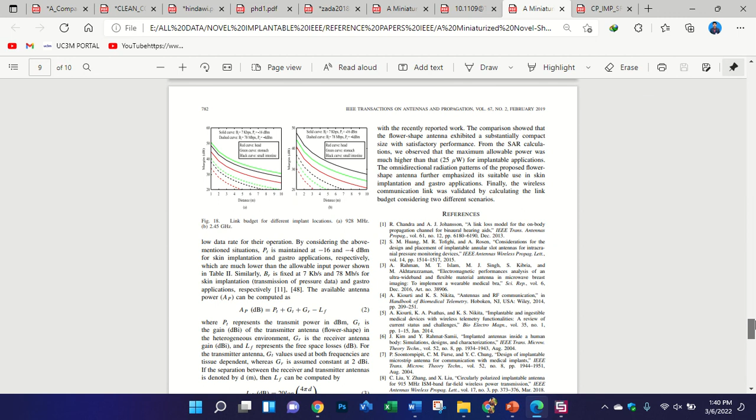In most of the papers I did not see whether they measured it or not. Okay, but I read many papers. They put these values of EMI, especially for medical antennas. Yes, that one is for imaging applications. Imaging or other applications, yes, but especially imaging. Yes, but here we are talking about implantable antennas, that's why. Okay.

Wait a minute. Where is the final version? Okay, I think I submitted it this way, but this is another paper accepted on implantable antennas. No problem, we can wait till it's published, because sometimes they change something and edit something.

Yes, this is a beer-shaped implantable antenna, and the shape is very nice, and I use one shorting pin at this side. This is not the finalized published version, because there is a shorting pin on this side and I did not add the shorting pin here. So this is the design.

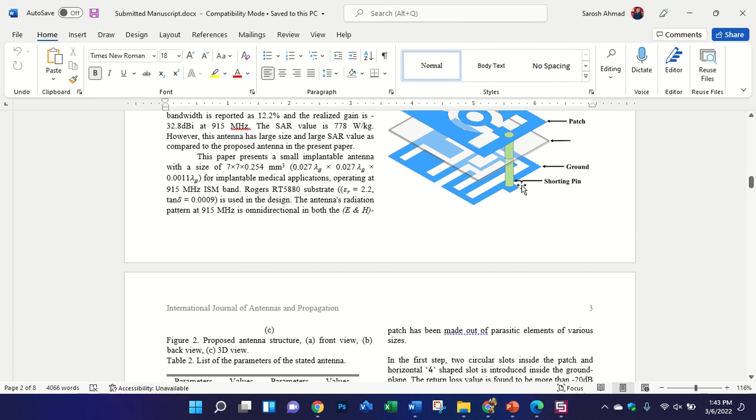I will ask Sarosh for a session on publication, to show how we make this layer separately. You said you do it in PowerPoint, I think. Yes, we hope you can show us.

Yes, somebody said there is an option in HFSS you can use other than transparency. In HFSS, I think yes, there is an option to make your layer transparent. But he didn't actually show me.

But these figures are designed in PowerPoint, also this one and the other one. In PowerPoint, I think when you create it, I did this a long time ago, but let me check here. You create it like this.

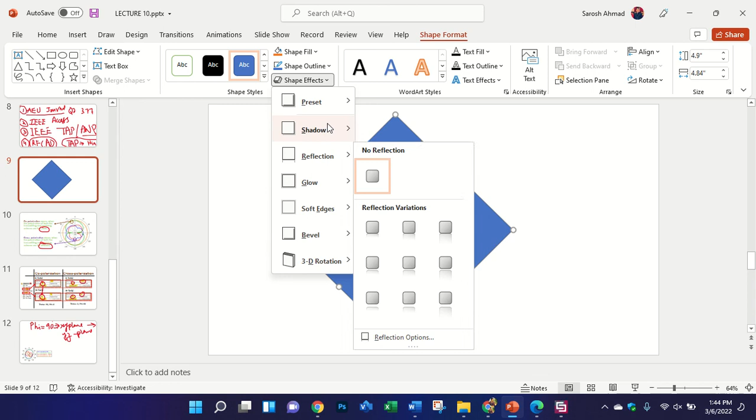Just rotate it like this, and double click on it, and you will find the option shape effects. And in the 3D rotation, maybe you will find options like this. Go to shape, format shape.

I tried in Visio also, maybe in Visio too, because it's all the same package, I think it may be found there also. Yes, in Visio I did not try, but in PowerPoint you can easily do it. It has the package, yeah, I think.

Yeah, it's okay, I got it. Thank you. Yes, in this way you can design it. I just wanted to know which option you used. Shape effect, it's okay. Yes, so in this way you can create many layers. By trial and error, yes, you need to try.

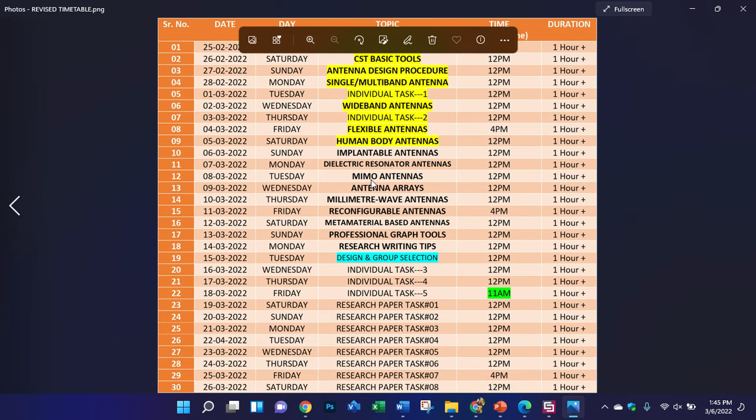Inshallah, tomorrow we have a lecture about... what lecture do we have tomorrow? On dielectric resonator antenna. This is another interesting topic, more than implantable. I was doing a review of one paper on dielectric resonator antenna, I just gave them the reviews on this paper.

But the problem with this kind of antenna is the volume. Everybody now wants to go small size, to make it compact, but it is difficult for a dielectric resonator. How we can do it is difficult, I think. You cannot take small size, because if you do, then it becomes more hard to fabricate. Actually, 3 years ago I tried to work on it, but I gave up.

But in my university, there is a good fabrication and measurement facility for this dielectric, also a 3D printer to print. We have many 3D printers in my university, in my lab. So I also like it if someone wants to work on it, and surely this is a very new field.

I am working on dielectric resonator antenna. I submitted a few papers to transactions and others, and inshallah I hope I will get a good response. I have very good designs on circularly polarized ones, because it is easy to make circularly polarized dielectric resonator antennas.